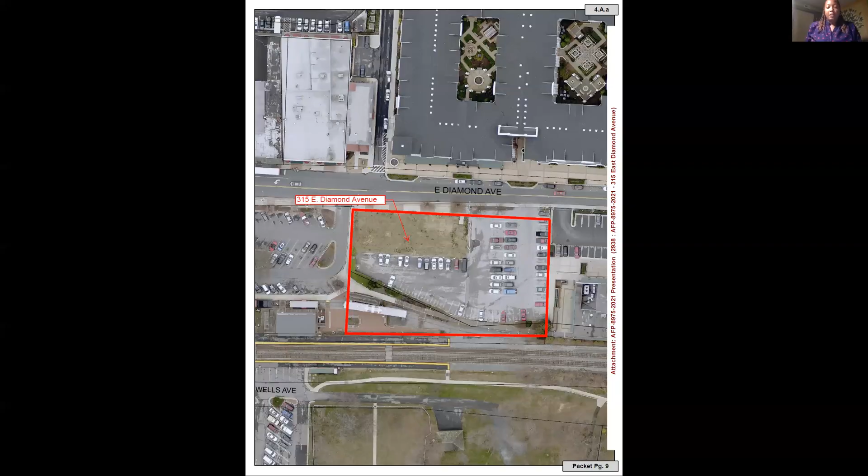Okay, you go ahead, Kevin. You're on mute. You're still on mute. There you go. Hi now. Can you hear me now? Yep, welcome. Hi, good evening, everyone.

Thank you, Jasmine. Yes, as we've gone through this process, there have been 6 different minor areas that we had to adjust throughout the plan. The first one was on the west elevation. There were some stairs at the end of the walkway. Those stairs were interrupting pedestrian access around the Budd car and the caboose. So we eliminated those stairs.

We also modified the railings on the west side of the pedestrian walkway to better match the railings that the city approved for the Budd car decks. So all the railings in that view would match. So that was the second one.

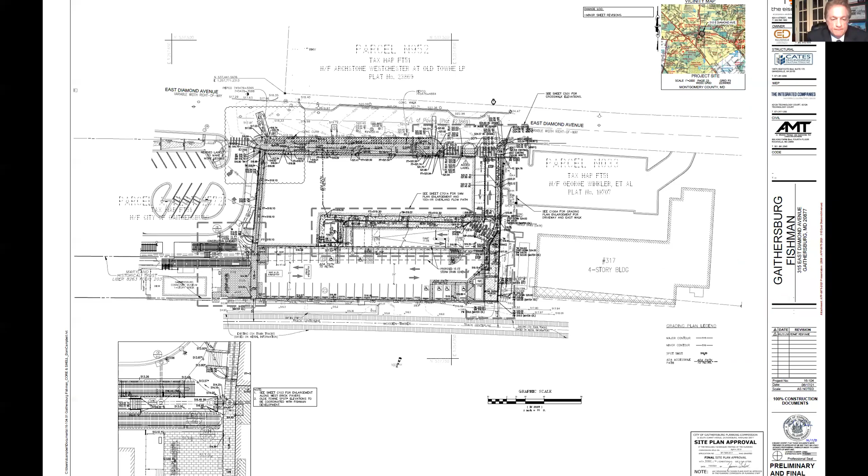So at the end, there's one last parking space, and then there's a striped off space. So am I correct that there is no vehicular egress at that point? They would have to somehow turn around and go back where they came. Is that correct? That's correct. Okay, so you're saying that crosshatched area is a turnaround? I guess it could be used for that. It's a non-parking space. Okay.

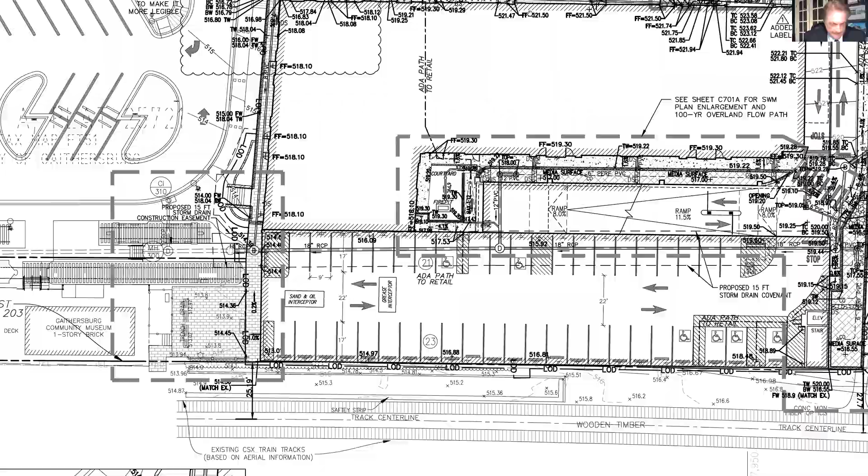Well, architecturally, I'll say I have my concerns on it, but that has nothing to do with the HDC. But I just wanted to pose that issue. All right, then can we go to any of the elevations? I guess there was page 302. Packet page 11. Thank you, Jasmine. Okay, great. That's a good one.

302, perfect. Okay. I recall the last time you were here, you had a very animated elevation, and it still may be. But I recall that, if I'm not mistaken, there were 10 different materials and colors on the elevation, which I found at the time to be questionable. Generally, I said two or three is pretty standard. More is a little bit acceptable, but as many as 10 I thought was way too excessive. So did you address that at all? Because I don't see any colors here, so I'm not sure that's been addressed.

Mr. Ash? I'm just thinking through. I'm sorry, I'm thinking I can only recall 5 different colors. Yeah, there were different colors and different materials. Right, material. Yeah, brick being one, reddish brick. And siding, then there's lighter gray, dark gray, and then black and white. I might not be completely accurate with 10, but I remember it was close to that, if not that. There were just way too many, more than I thought for a typical building.

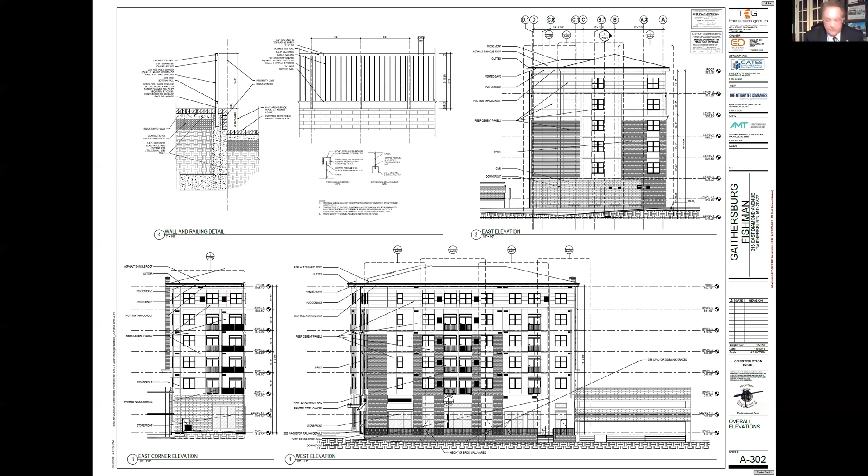I don't know if we should worry too much about the, I guess we would. I was gonna say the train tracks, because essentially you do see that elevation from across the train tracks as part of the city's view. So may I suggest you guys look at that. Can we go to the next elevation page? I don't know if it was 301 or 303. There you go.

Thank you. Is the bottom elevation the street front, and the south elevation the view from the train tracks? Yep. So the south elevation that you see here, that's the one that's facing the garage. So that's what you would see across the train tracks? No, you won't be able to see it, the garage is right in front of it. Oh, okay. Do we have an elevation of the garage, what we would see?

Let me, if you go to packet page number, I believe it's 35. Yeah, okay. So that's essentially what we would see from the city view across the train tracks, which is certainly a major view, a major elevation. If there's something you guys can do to make that look more architectural, is the only word I can come up with. Going back to the other elevations, go up to page 301 again, please, Chris.

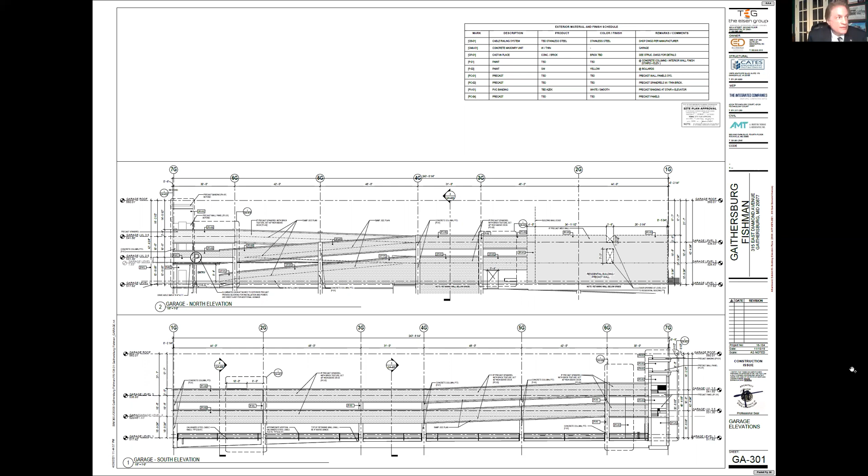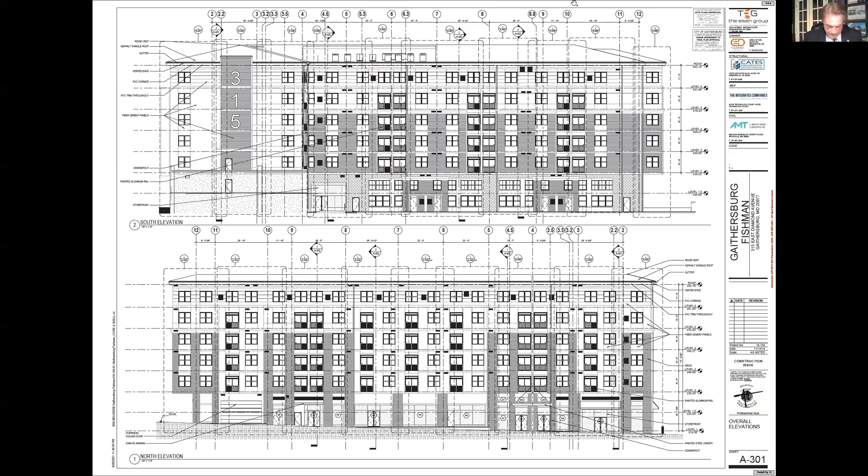So let's do Commissioners Open Forum. Since everybody spoke, jump right in if you have any further thoughts. I just wanted to concur with Dean's comments about the garage, especially. That view from across the train tracks is going to be very visible. So whatever you can do, if anything, to make it more cohesive with the building would be helpful.

Good, thank you. Anybody else? Nobody? Okay, well, that's it. Thank you very much for your time, and we do hope that you consider some of our thoughts, Mr. Ash. Great. I appreciate it.

Your time and help. I think the building looks good, and from my personal vantage point on the densities, I'm all for density. I am also an urbanist, and I love that the city can grow by bringing more people in. With that you have traffic, but that's part of the nature of an urban center. So one of our strategies, and this goes to Mr.

Kitte's concern, these are smaller floor plans, so we are hoping that these residents are utilizing mass transit more. It is right there at the train station, so that's the concept behind utilizing this space for its highest and best use. And again, it's a 60-40 split, a higher percentage of one bedrooms and smaller one bedrooms. It's a little different product type than what's across the street, which has larger ones and much larger twos. So we're appealing to a more transient demographic.

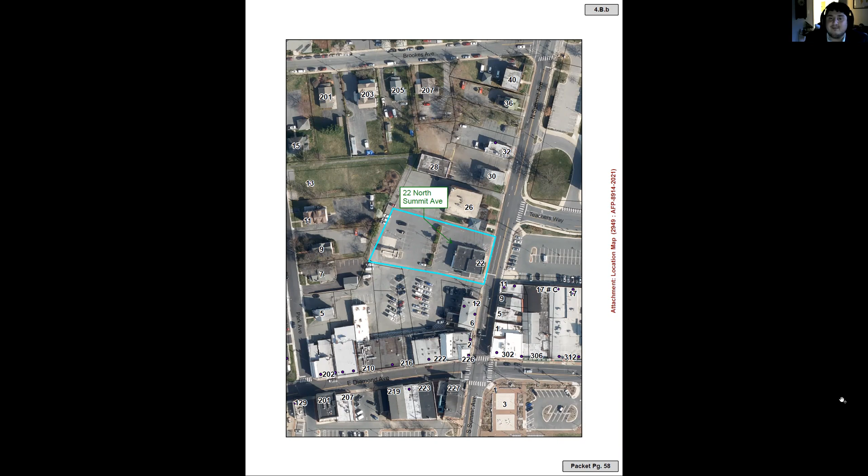And here to present from the applicant's team is Dean Packard. Welcome, Mr. Packard. Welcome. My name is Dean Packard. I'm a civil engineer and I'm representing the applicant Scott Lee to modify the existing Bank of America building to a high-tech laundry.

What we're proposing to do is a simpler version of the last case where we're going to keep the building pretty much as it is with the existing height and structure. And the only minor modifications we're making to the building are to add a double entry door on the left-hand side of the building and some louvers for air ventilation on the right side of the building. There will be a fence on the left corner of the building, shielding the side view, and air conditioning units that will be placed on the ground on the side of the building.

And the only other modifications to the site itself, we are removing several areas of paving to add more green space to meet the city requirements for 10%. And as far as the look of the building, our proposal is to make it look the same with the same color. And as I said, the same height and visibility from the street. The architect and the owner are on the call with us now, and I am available for any questions from the commission that I can answer.

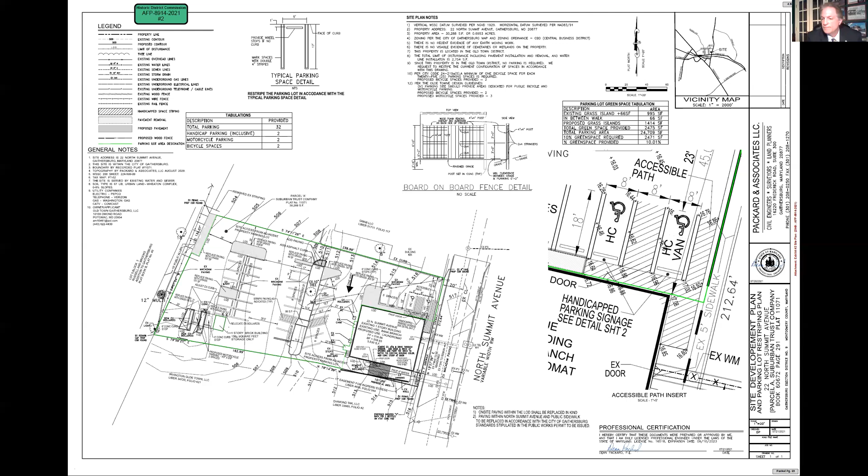Wonderful, thank you. Is it Mr. Kim is the architect? Would you like to add anything? You're on mute. You're still on mute, Mr. Kim. Well, the mute button, I believe, is in the bottom left of the screen. Can you put that on? There you go. Okay, can you hear me? Yes, we can. Okay, great.

Yes, we're trying to convert to the laundromat. So we have to convert for the laundromat use. So we need a little bit of change to the doors, entry. And also we need the fresh air to the dryer vent. So we're trying to change the minimum possible. So that's our intention. Okay, thank you.

All right, sounds like everybody's spoken on ownership. So next we'll go to the public. Public is now invited to speak. To indicate that you want to make a comment, if you're on a computer or laptop, move your mouse to the bottom center of the Zoom window, and you should see a raise hand button pop up. Click on that button and we can call on you. If you're dialing in on a telephone, press *9 to raise your hand. Seeing no one. Okay, very good.

All right, then let's hear from the commissioners. When I call your name, please state your thoughts and questions for the applicant. Commissioner Cote? No question, no comment. Okay, Commissioner Feinstein? Yes, my main comment has to do with the windows that are being closed in on the side elevation. I think it's like six windows are being closed in, if I'm counting correctly.

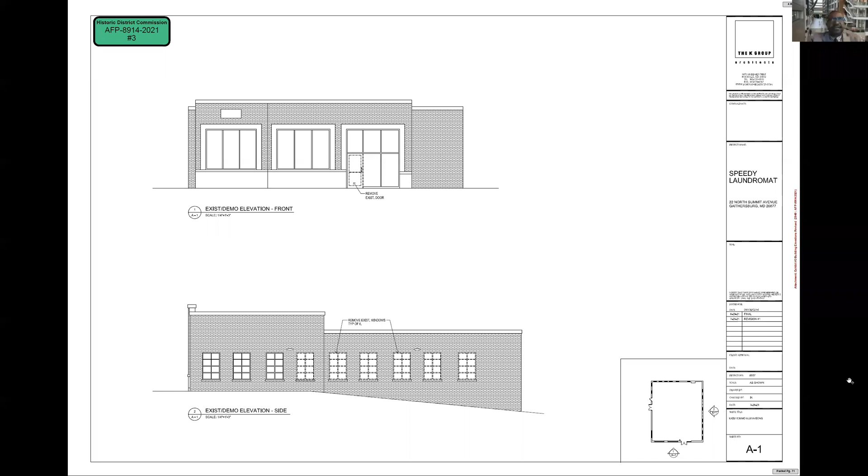Yeah, so you have 6 windows along the side elevation there. I have no issues with the door, the switching from the single door to the double door on the front elevation. I think that works fine. It's more just if there's an alternative to being able to close in those windows.

This is Scott speaking. We had looked at that option, but the building was constructed a really long time ago, and it wasn't built all at once. They were built in different phases and stages of time, it seems like, and there were possibly 2 or 3 buildings that were kind of put together over time. When we looked at possibly penetrating through the roof, there were some challenges, I think, that existed with the current roofing conditions. And it made more sense to use the existing windows.

And again, it's not all of the windows. We are trying to use the ones that are in the back. So that's why we were able to push the dryers to the back of the store as much as possible, and try to minimize the number of windows that we have to close up. There's 6 that are being proposed to be closed up. 4 of the 6 are going to have to be converted to a louver, and we're just reducing the size of that window.

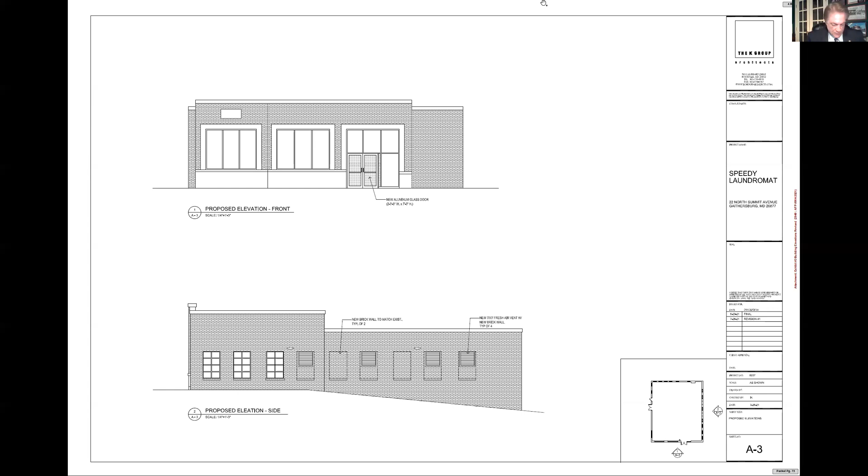Okay, well, thank you so much. Since this is a courtesy review, does anybody want to jump in with any thoughts? Yes. If I may, I have one question. The existing guard and handrail, can you tell me what material they are made of? On elevation A2, elevation A4. I'm assuming the metal rails, right? The material. This is Dean Packard again. What exists there now is a steel railing. Okay. That's been there for a while, and the wood fence will go back to the double doors there.

Okay. So the reason for my question is I want to address the new board-on-board wood fence. I would suggest that you use this metal. So basically, you're trying to repeat what is already there, and then use wood behind the metal. So from an architectural and aesthetic perspective, when you look at the elevation, you will see metal, but the wood is actually behind. It's like transparent, behind the metal, just to give the building a more architectural appeal. That would be my suggestion. As far as removing the windows, I agree with my fellow commissioners.

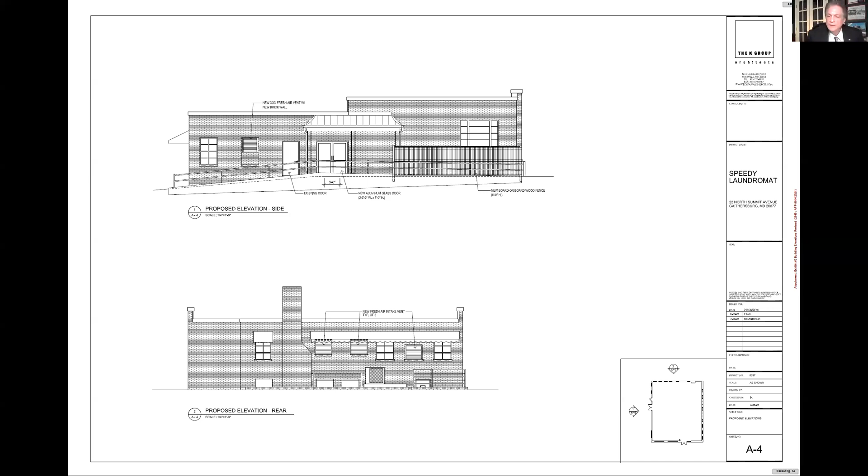So the metal, I don't think it works because of metal. This wood fence is totally closed out, cannot see inside. But if you put the metal, you can see inside. So what we can do, we can paint same color with the metal railing and wood fence. That we can do. All right. Okay. Yeah, that's all right. I'm sorry, go ahead. That's it. Any further from anybody else?

I'll just end by saying that I think Mark's idea of exploring venting through the roof is a big plus if you guys can achieve that. It'll allow you to save most of those windows and probably get more ventilation because you can open up. Also, I would say one more thing. Yes, sir. We have two vents, exhaust vent and the fresh air vent. Fresh air, yeah. We cannot put together. No, but they would be separate. They would be on different parts of the roof.

So mostly our design is all the exhaust vent goes through the roof, fresh air from the wall. On the wall, yeah. So the vent on the elevation, that is for fresh air intake. Yeah, right? Intake. Okay. Your exhaust will be on the roof. Okay. But what we can do is like a full size of the vent, like a window size. Then we can reduce the number of the fresh air vent.

Okay, no other comments from anybody? All right, so since this is the courtesy review, there's no voting, so we'll move on to the next. So thank you all for presenting. Next then we have two historic area work permits. The first up is HIST 8965-2021, placement of 96 square foot shed, 4 Walker Avenue in the R90 medium density residential zone. May we have an introduction from staff?

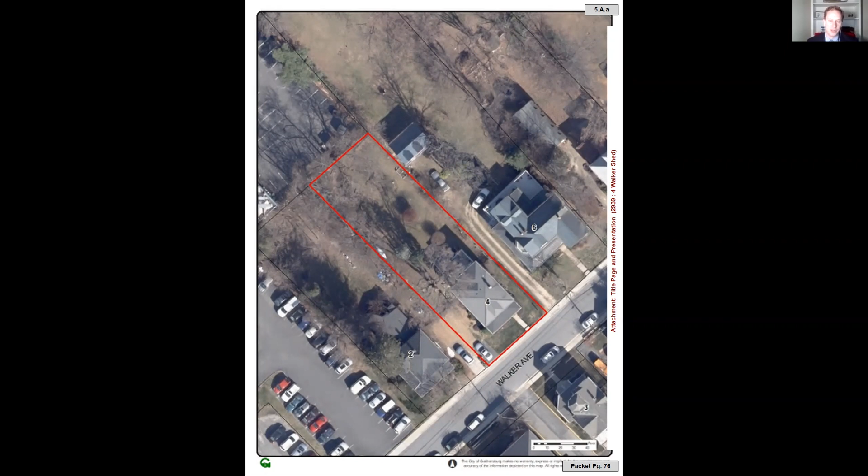Yes, if the tech team can pull up page 76, please. The application comes through the HDC in accordance with section 24-227 of the City Code. The subject property is contributing to the Brookes, Russell, and Walker Historic District. The applicant proposes the installation of a 96 square foot prefabricated shed in the rear yard. Next page, please. As noted here in the design guidelines, accessory structures are to be located in the rear yard. The City Code has additional requirements for size, lot coverage, height, and distance from property lines for accessory structures.

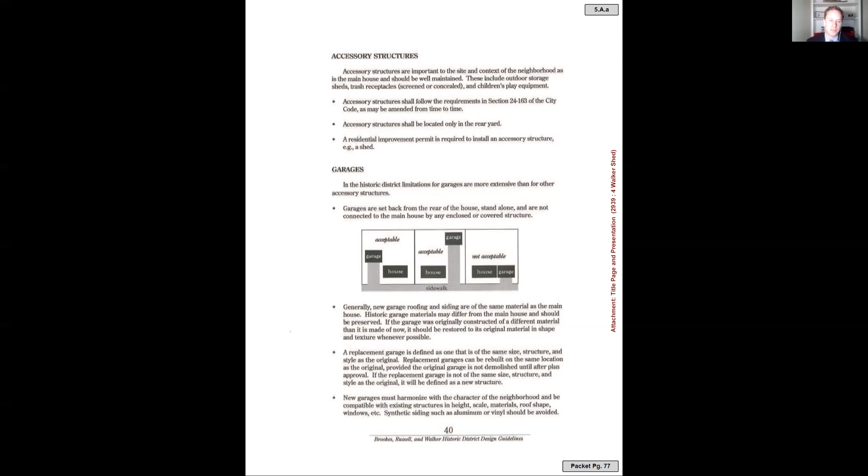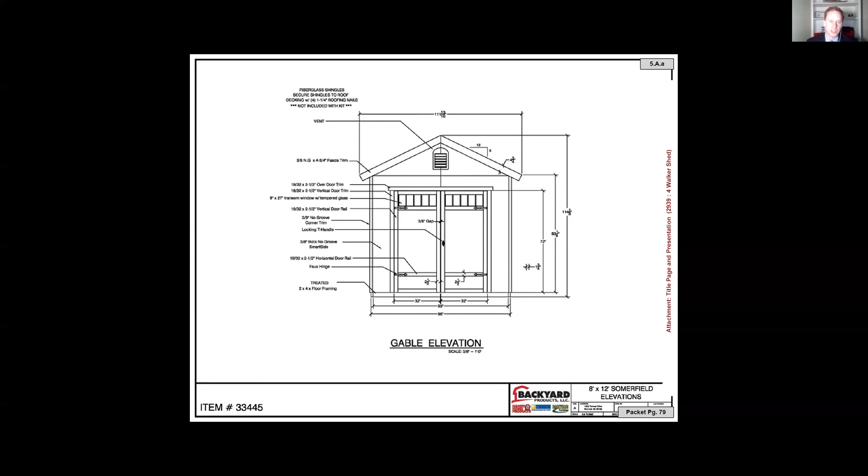Next page, please. The applicant seeks to install the 96 square foot garden shed in the rear yard. It is the Backyard Products' Somerfield model, which we see here on the screen. Not necessarily this color, but this is the model. Next page, please. And here's a drawing of that model. The shed will measure 8 feet wide and 12 feet long and stand 11 feet 4 inches tall. It will be accessed via central double doors with transom lights and decorative hardware. The wood frame walls will be covered with SmartSide, a wood composite material.

Next page, please. Here's the side view. The gable roof will be covered with fiberglass shingles. Next page, please. The shed will be located near the rear fence in the rear yard. Staff seeks a condition that the shed is located at least 3 feet from the property lines in accordance with section 24-163 of the City Code. It meets all other City Code requirements.

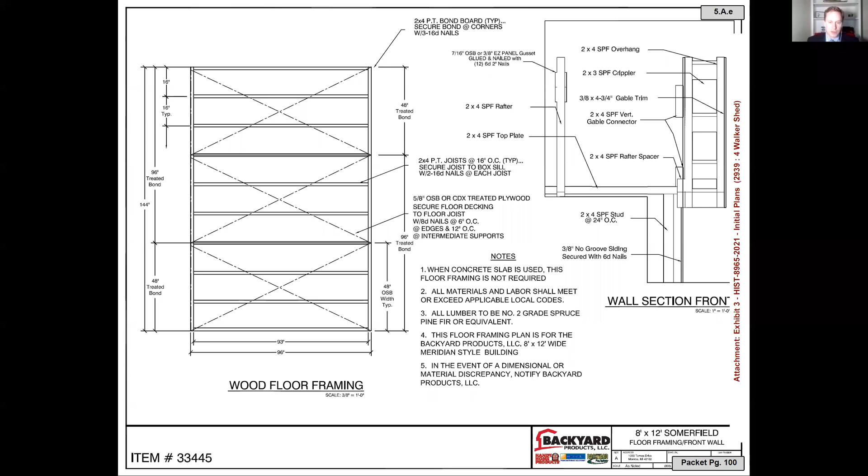Nope. No, that's not it. Next page, please. No, it's a photograph like the first one was. Well, I don't recall a photo, but maybe it was. I recall a drawing. I believe it's next page. If we could try 102. No, it's online. So this shows 2 doors here. Well, I'll tell you, that drawing alone is good enough for us. Oh, right. Yeah, that's where the door will be. There's a window. Right. There's a window on top, and that's where the doors will be.

Okay, so now, Ms. Murray, let me restate it. The part with the doors, do we consider that the front part of this shed, and that's what will be facing your house? Is that correct? Correct. Okay, so essentially, everybody, that's the front elevation now. The doors are off center, and the gable end is on the short sides. So we can figure that out for ourselves. So I have no problem with us moving forward with this right now. Great. Any other thoughts from the ownership before we go to the public?

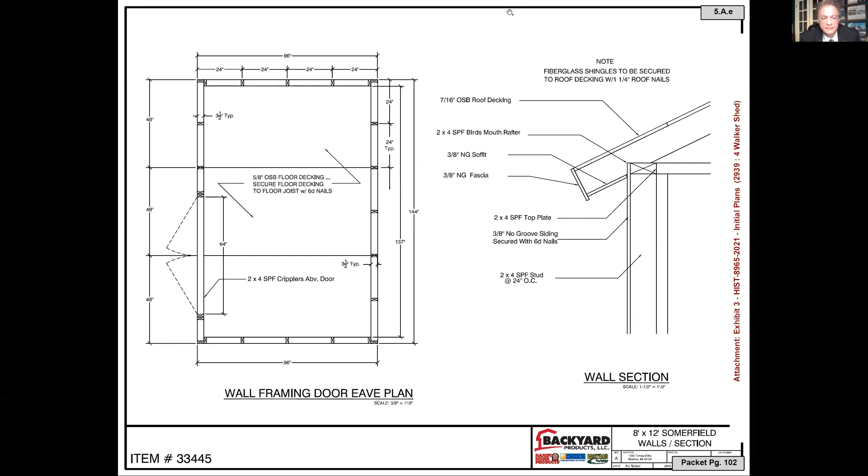No, it's pretty straightforward. I'm going to use the same colors I have on my house. Wonderful. And Chris Berger did say that you're going to be using horizontal siding. It's Smart Side, which is a composite material. But it's going to be horizontal. I believe it's a flat piece. Flat. Oh, so the drawing is what it's going to look like. So it's going to be like T111 or something like that. Right. I have German siding on my house anyway. So this is not going to look anything like that. No, I can't do that. Okay. So the drawing that they showed shows just flat panels. I think we have an idea of it.

So with no further information from ownership, I'll go to the public. All right. The public is now invited to speak. To indicate that you want to make a comment, if you're on a computer or a laptop, move your mouse to the bottom center of the Zoom window, and you should see a raise hand button pop up. Click on that button, and then we can call on you. If you're dialing in on telephone, please press *9 to raise your hand.

I see no one. Okay. Then we'll go to the commission. And when I call your name, please state your thoughts and questions for the applicant. Commissioner Cote. My question was already answered by the owner. The color is the same as the house, and I'm happy with that.

Okay. Commissioner Feinstein. I have no issues with the application as long as it meets the condition that the city has placed on it, with it being 3 feet from the property lines. Right, okay. And I'm sorry about that, because I did have that marked on one of the plats, but not the one I included in the packet. It's actually gonna be 4 feet from the property line.

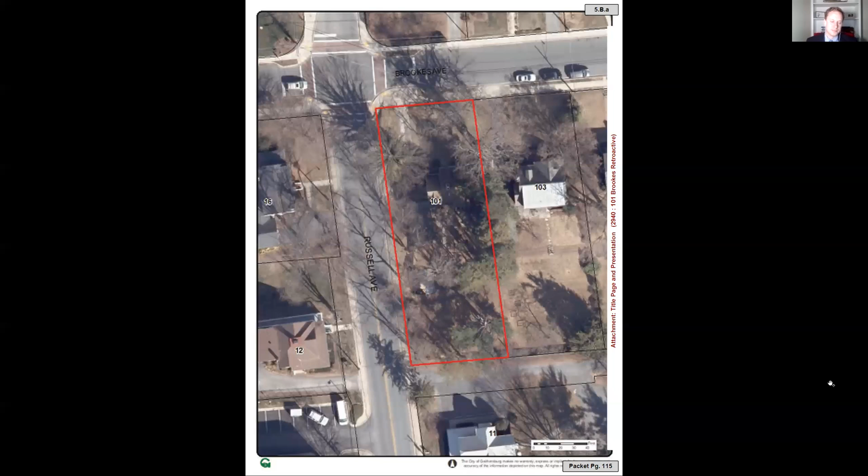Thank you. Because 101 Brookes is a non-contributing property, I'd like to emphasize section 24-227.2b of the city code, which reads as follows. In the case of an application for work on a historic resource, the commission shall be lenient in its judgment on plans for structures of little historical or design significance, or for plans involving new construction, unless such plans would seriously impair the historic or architectural significance of surrounding historic resources.

The Historic District Commission shall be strict in its judgment of plans for sites or structures determined by research to be of historic, architectural, or archaeological significance. And now we can go back to page 116.

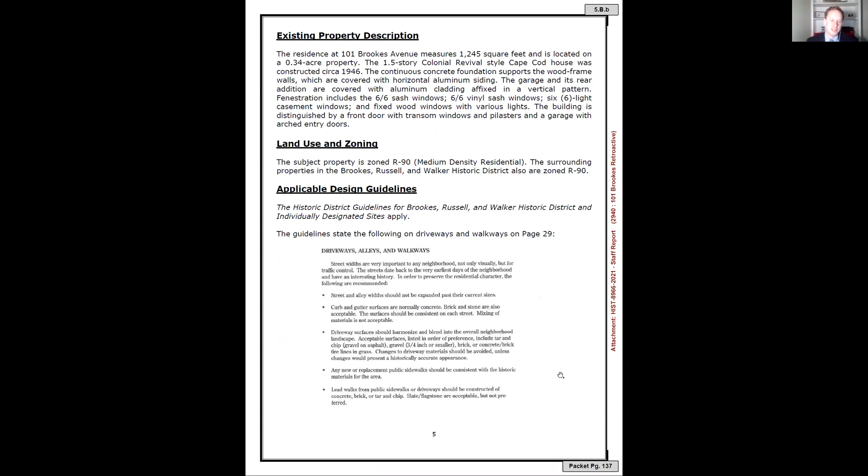Thank you. The Brookes, Russell, and Walker design guidelines apply. The fifth bullet under driveways, alleys, and walkways reads, lead walks from public sidewalks or driveways should be constructed of concrete, brick, or tar and chip. Slate/flagstone are acceptable, but not preferred. Next page, please.

The first bullet applies here. New, additional, or replacement construction work on existing houses should be compatible with the historical design elements. And next page, please. Under materials, the first bullet reads, the historic character of a property shall be retained and preserved. The removal of historic materials or alteration in spaces that characterize a property shall be avoided. And next page, please, 119.

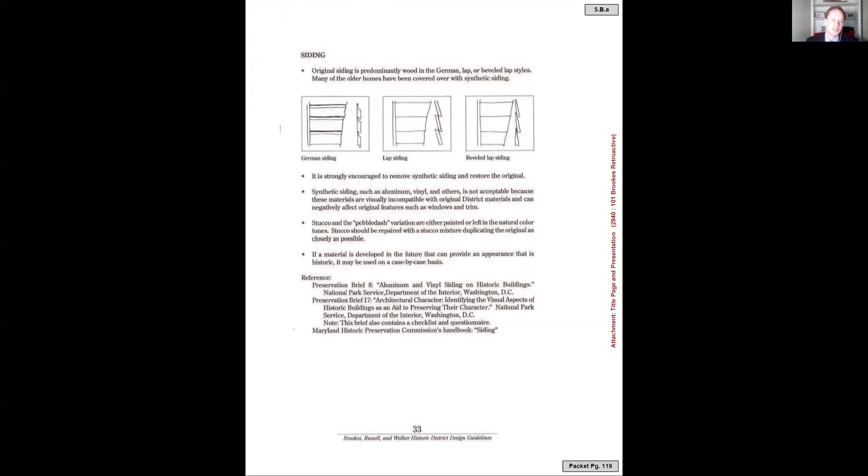For siding, the last bullet reads, if a material is developed in the future that can provide an appearance that is historic, it may be used on a case-by-case basis. Next page, please. For roofing, it reads, in the Brookes, Russell, and Walker Historic District, there are a few examples of original roofing materials remaining. These were of pressed or standing seam tin, wood shake shingles, slate, or patterned composition. Care should be exercised prior to replacing these with modern materials.

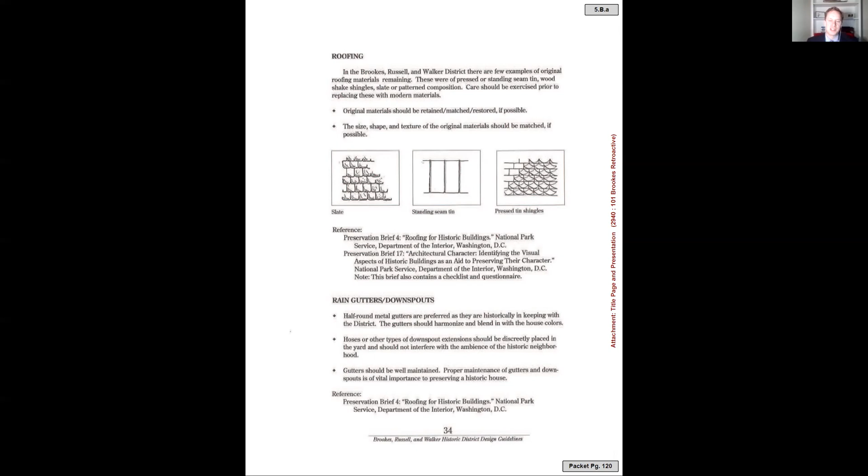In the bullets, original materials should be retained, matched, restored if possible. In the second one, the size, shape, and texture of the original material should be matched if possible. Next page, page 121. For shutters, the first bullet, shutters should be sized, placed, and attached to appear functional.

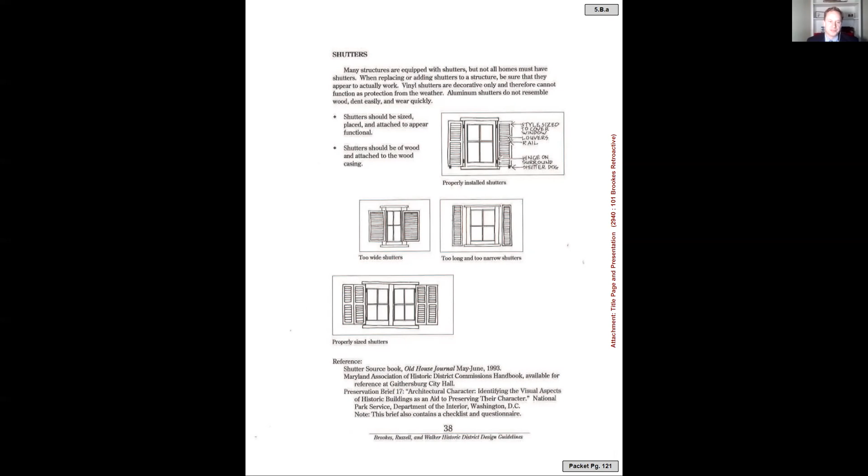And next page, please. So first, we'll look at the roof. The photo here is from 2019, when the property was for sale. It shows the previous wood shingle roof. And if we can go to the next page, please. This is the roof now, covered with asphalt shingles. Though it was completed without a HAWP, staff supports the work because the property is non-contributing to the district.

A number of surrounding properties have composition shingle roofs, and staff also notes that the wood shingles were only present on the front facade. The roofs on the back of the residence had been covered with composition shingles for some time, so there is precedent for the material on the property. And we'll look at some of those roofs now. Next page, please. This is in the rear yard. This is also from 2019, but it's still like that today. And next page, please. And this is the rear of the house, already had composition shingles on it.

Next page, please. So next we'll look at the shutters. Again, these are how they were arranged in 2019. We're looking on the left side of the front door, 2 shutters, 2 faux shutters to either side of the windows. And next page, please. Here they are now. So according to the applicant's representative, the previous shutters were removed and repainted, but one was obviously not reinstalled. Staff does not support removal of the faux shutter and the current placement of the shutters.